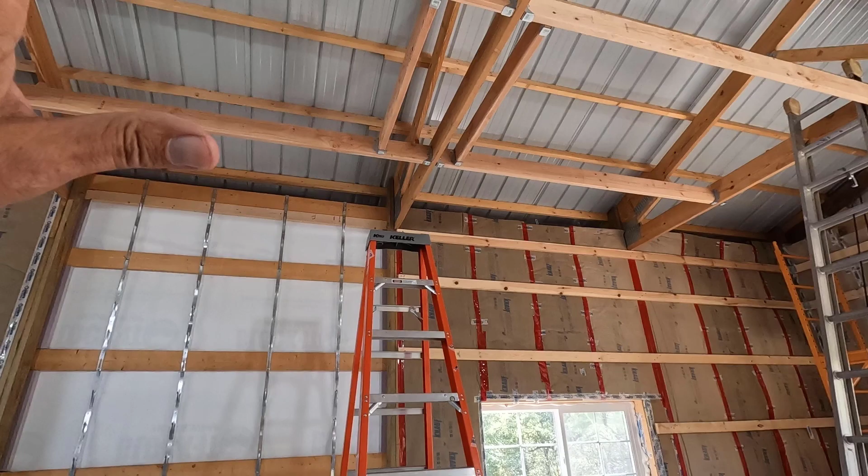Today I'm going to show you how to locate and pre-install shop furnace hookups.

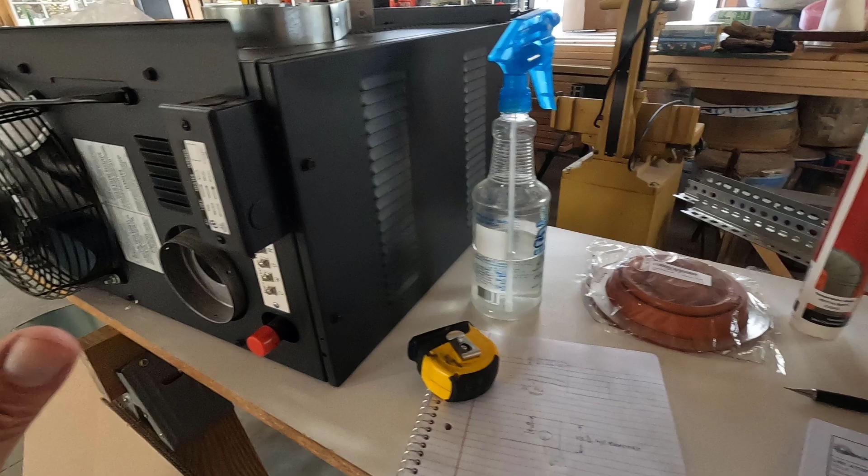So what I'm doing here is going back and forth to the various pages in the installation instructions, getting information like this. This is my unit right here, and I'm double checking all that on the unit itself and then marking that on my notepad. Once I have everything located in one place right here, I'm going to start cutting tin, routing propane lines, running the electric, all that stuff.

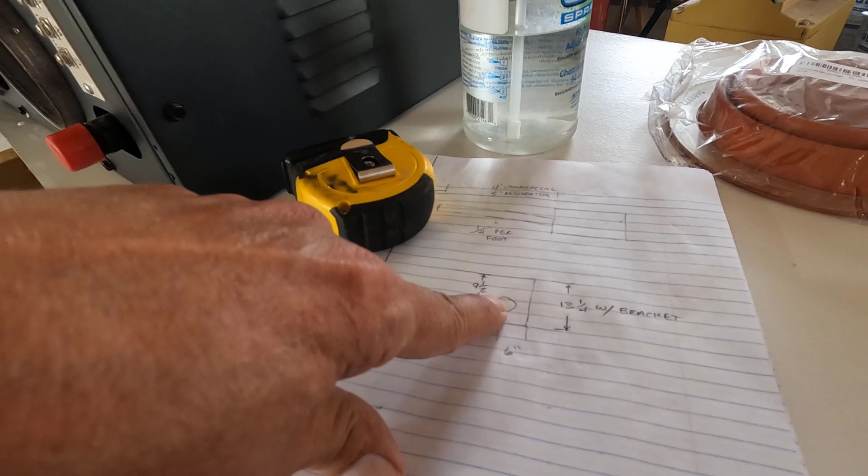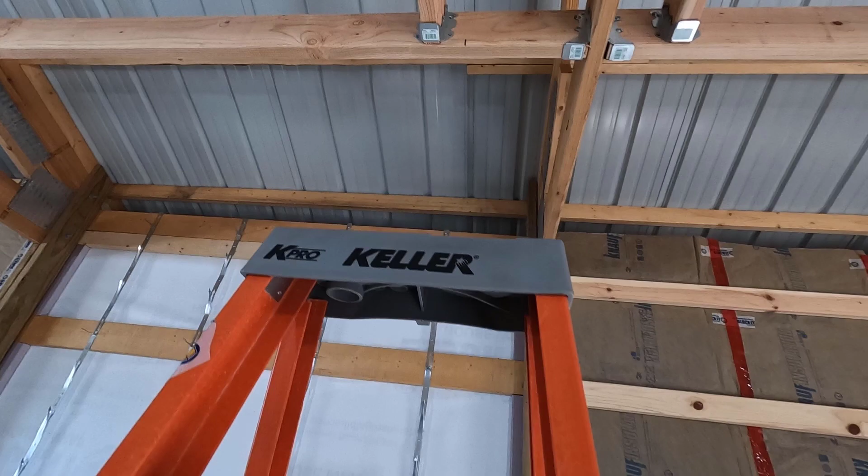So what I have so far is the exact location of the flue on the back of the unit. Now I need to transfer that to this area right here. I put in this special blocking here, and for the life of me, I can't remember if that little hash mark, you can see I got a little hash mark right here, is supposed to be where the flue is or not.

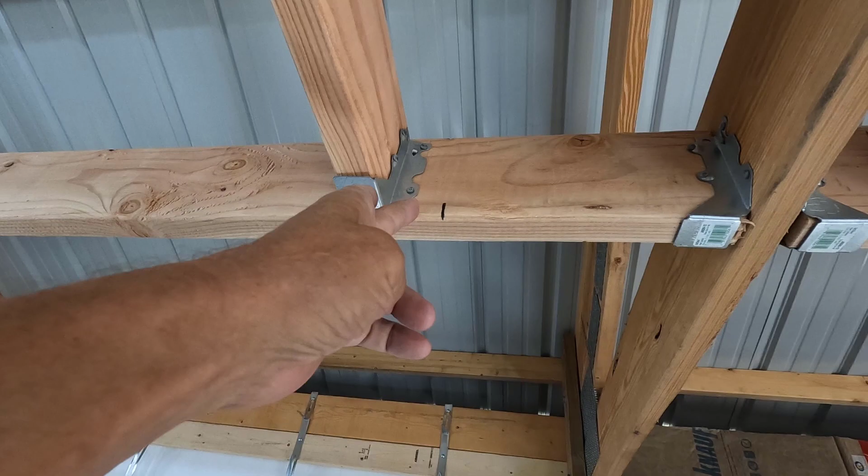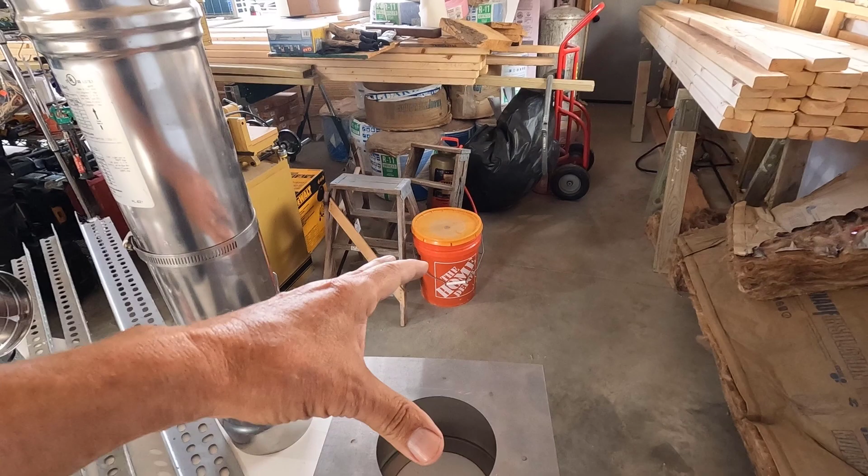But once I get that figured out, I'll transfer a line over to there. What I'll do is measure from here to that line and do the same thing over there. Then I've got to come downwards and figure out where this flue is going to come through the wall. I've got to put this stuff up there. Once I figure out where it's going to go through the wall, through the tin here, I have to measure the slope. It's got to have a downward slope to the unit, and that'll give me the height of the unit down from the ceiling. It sounds a little complicated, but I'll explain it as we go.

I did the very same thing with a mini split in our addition. I put a chase built into the wall a couple years ago, and a couple weeks ago I installed the unit, and all I had to do was drill a little hole in the wall, and there was a chase going through there. I could just stuff all the stuff right through the wall. In this case, the entire hole is going to be in place, and once I get the ceiling in, I can mount the furnace and then run the line right through the hole.

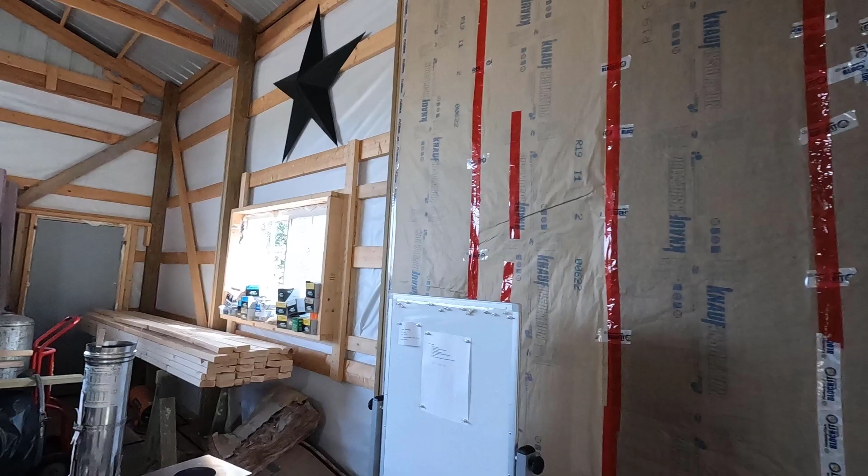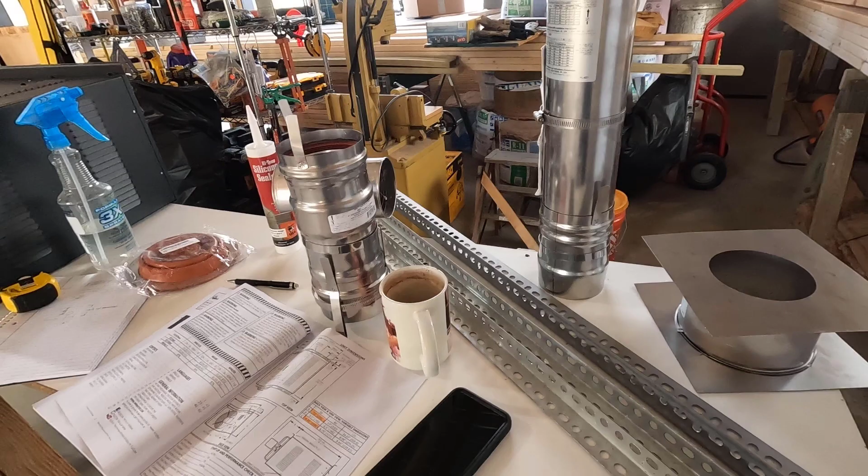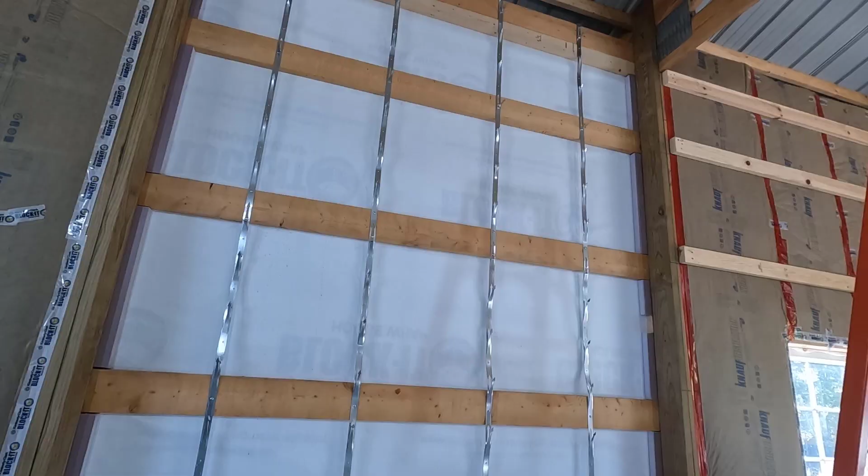Whereas this will be on the outside, and these two will be on the inside, and those two will be connected by a piece of tin right here. This will be the outer jacket of that. All right, we'll figure all that stuff out later. Right now, let's figure out where this flue is coming in from the post right there, and then from there we'll get a location where that goes through the wall.

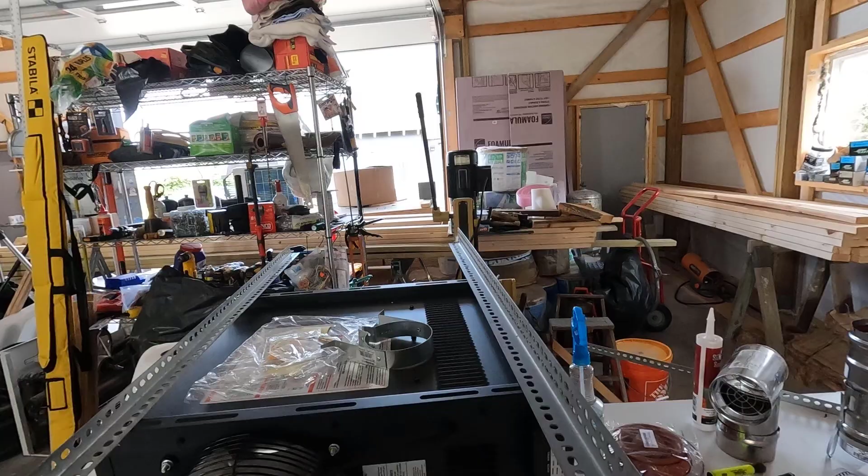All right, I have everything mocked up here. The spacing on the mounts up there is 22 inches. And let me try to get this tape measure for you.

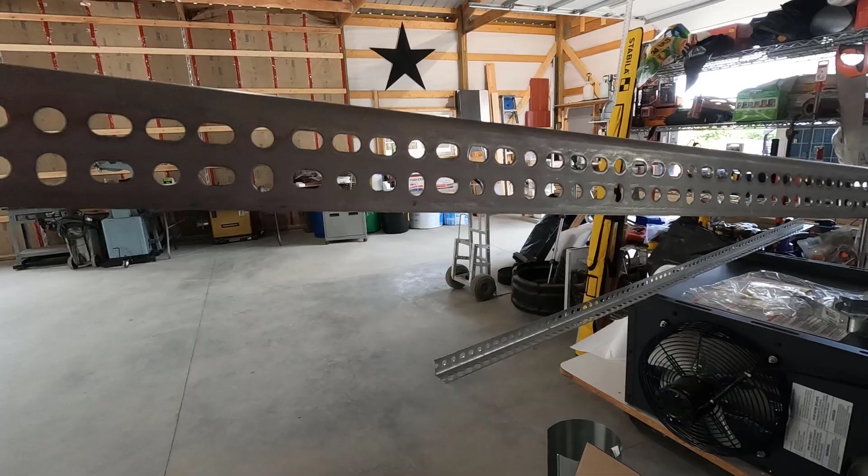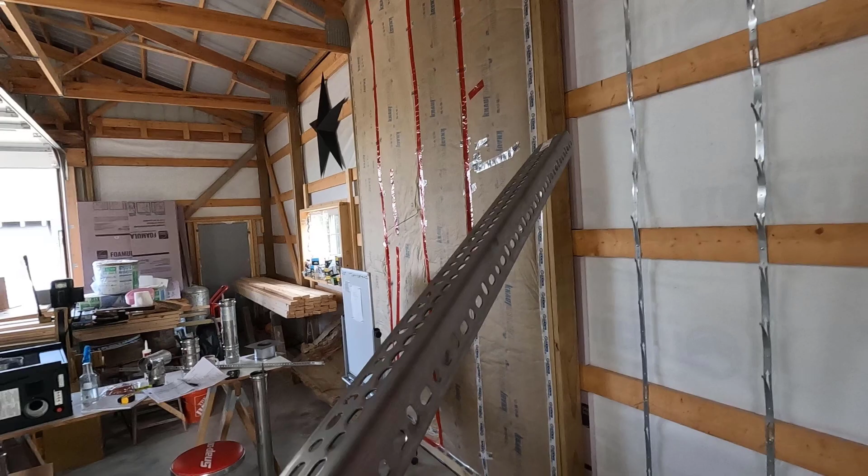That will look like this on the unit itself, but it's not going to sit like this. This is going to be cut in half, and these will go on the ceiling, and they'll actually go on like this, and then we'll be using these to come down to the unit. I'll show you that real quick. It will look like this with the flat part outwards, and it'll be attached just like that. Then the other members will attach to this lower part with the double holes in it.

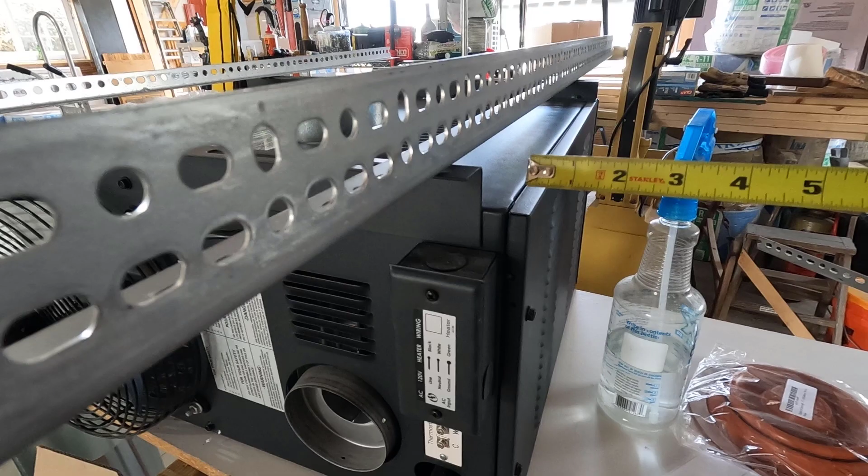So with the bracket in the correct location, that gives us 1.5 inches from the outside of the bracket to the outside of the unit, just like this. So from the bracket up there, it would be the 6 inches minus the 1.5 inches, or 4.5 inches. 4.5 inches from the outside of that wood member there to the hash mark. All right, so 4.5 inches is to right here. That one is incorrect - that one was at 3 3/4.

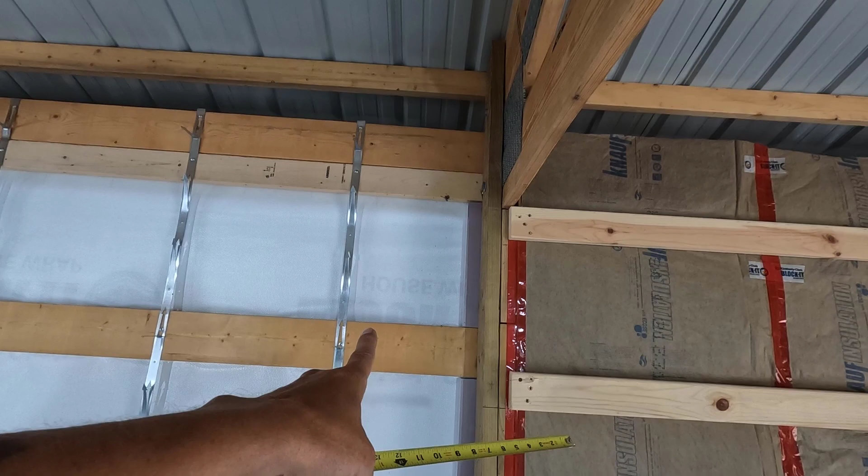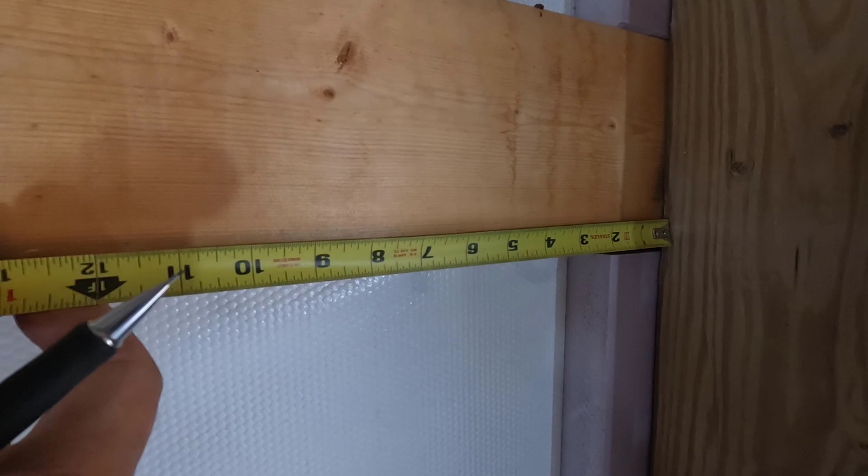Now we'll get this measurement. It is 9 3/4 from the bottom of the truss here, so we'll have to remove 1.5 inches from that. Our flue's going to go out down here, so let's get that marked over there. I lost my head mount camera, but this dimension is going to be 8 1/4, which is right here.

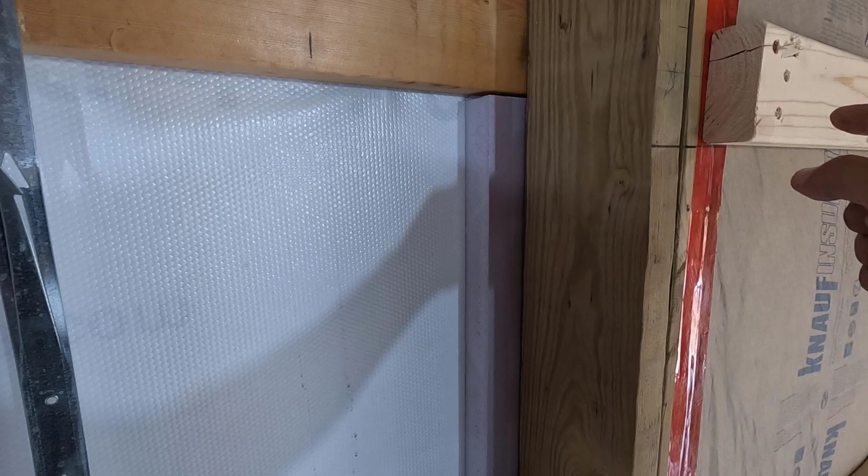So now that I have my 8 1/4 marked, I have to figure out the height. I've got to go below this girt here so that I don't hit this girt right here, but I need to attach that pass-through flashing to both of these. So I might have to add a little bit of wood to the bottom of this. We'll see - let's get some dimensions here.

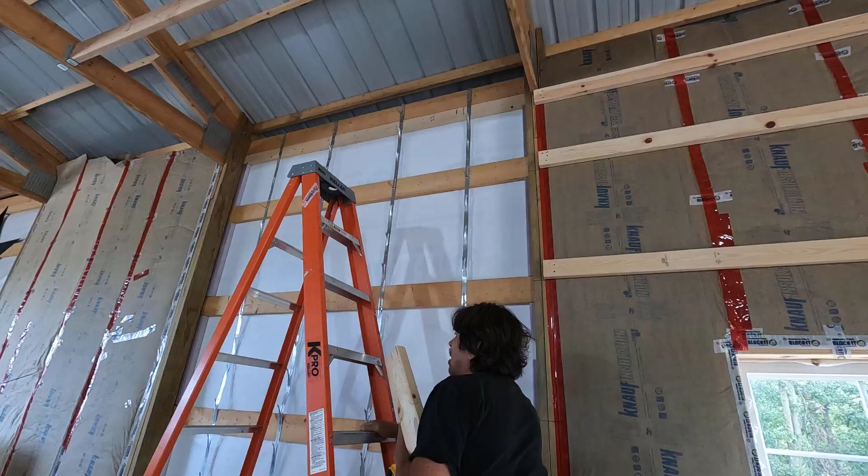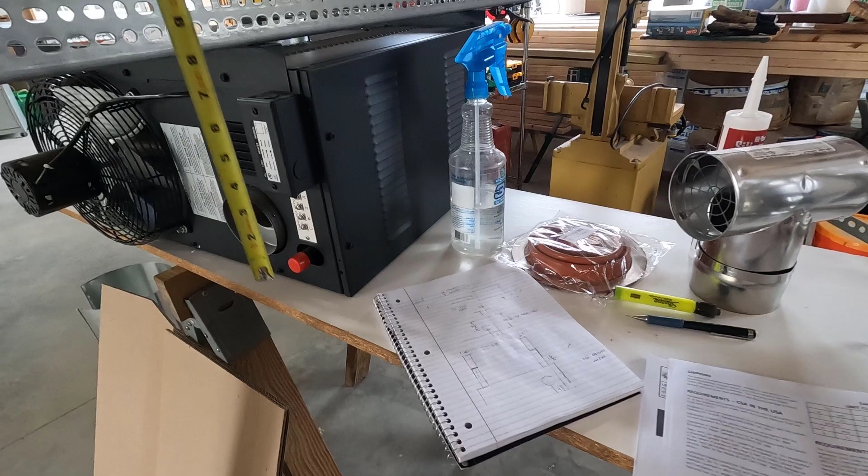All right, now it's time to check the height of this unit with the bracket in place. We have a little more than 15 3/8, and we would want at least 2 inches in addition to that. So we'll call the minimum height 18 inches.

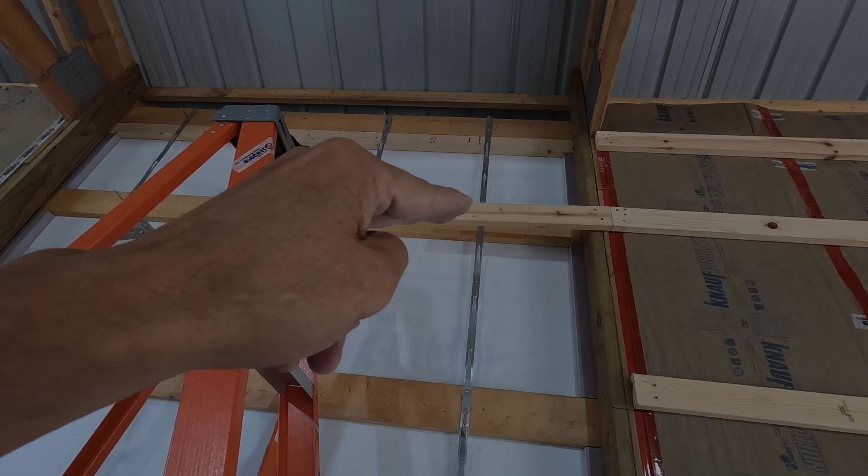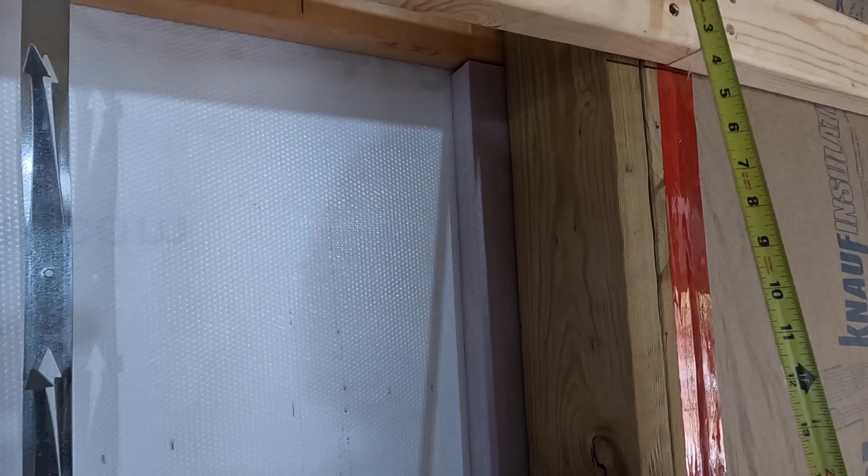So I got to measure down from the bottom of the truss there 18 inches, and then try to figure out if I can go above the girt or if I have to go below it. Okay, things are coming back to me now. 18 inches means I'm going to have to go below this girt, because 18 inches comes to right here somewhere.

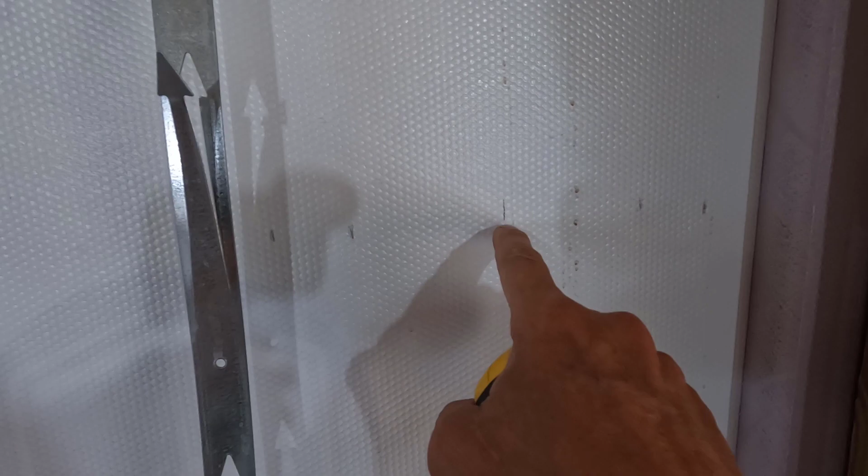That's not a problem. The problem is that this 8 1/4 dimension isn't going to work. I have the raised parts of the tin siding right here and right here, and centered on that we come to 8 7/8. So I got to go over 5/8, which is no problem at all because

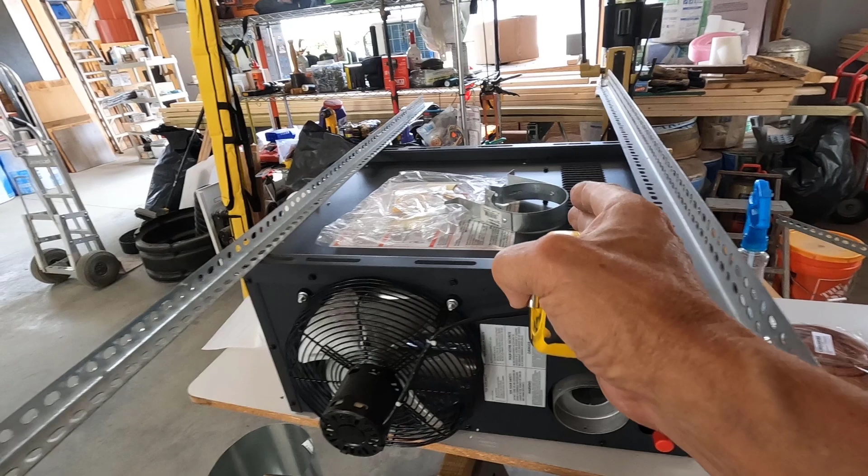of these real nice long slots. The brackets still got to go wherever they got to go, but the entire furnace is going to move over by 5/8 of an inch, which I have plenty of room for on this. It's actually going to move that way, so all that's good.

Now I have to figure out how I'm going to get this pass-through flashing attached to that wall, and I got to get this one attached to the outer wall.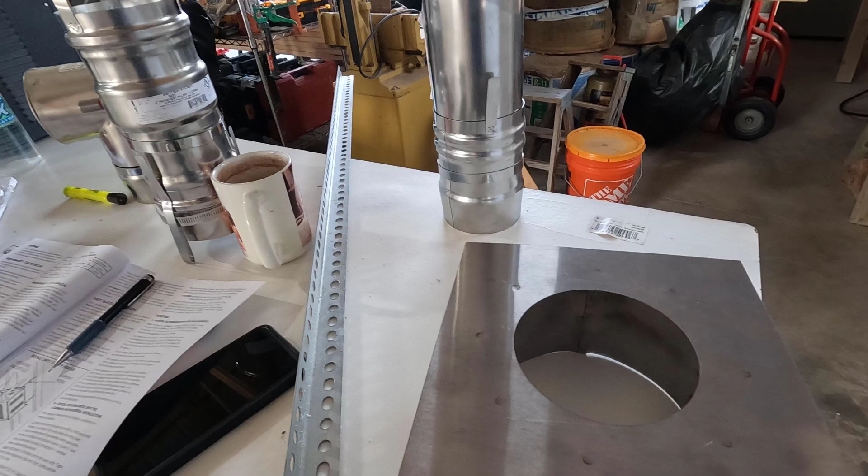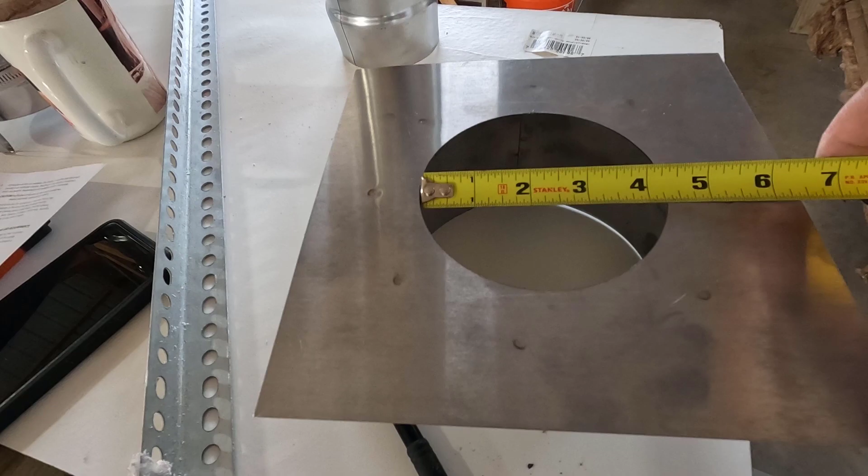So we'll just move everything over by 5/8 of an inch. All right, now for the wall thimble. On this particular one right here, we have a 2-inch outside space all the way around, and then we have a little bit more than 4 1/4 inch hole in there. On this one, we have about 1 7/8 inches. Same here, there's 2 1/4 and 2 3/16.

None of that really matters. What we're going to do is take the center dimension on this one and then figure out how much this is going to go. What is it? 1 1/4 inches. This is going to go onto the girt 1 1/4 inches.

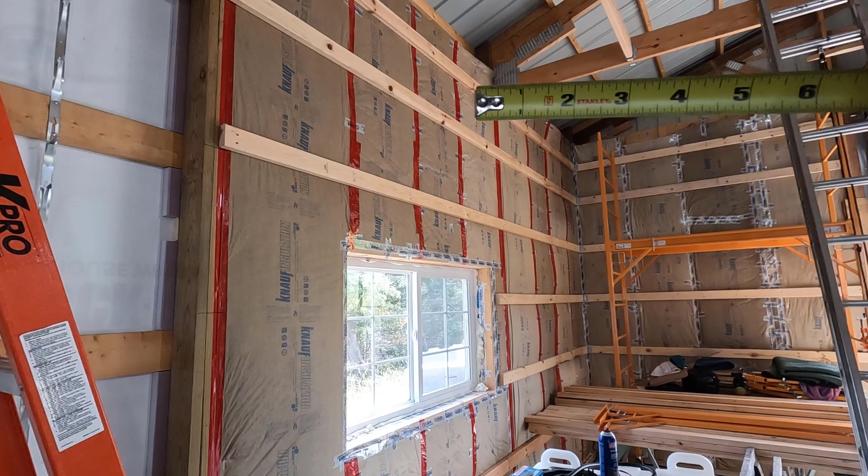So we'll measure down to the center of this, then use a level and transfer that line to the outside wall. Then we have to go up about 3/16. This wall at this area is a little over 8 inches thick, and the pipe wants to pitch at 1/4 inch per foot.

So what we need to do is have the outside one 2/3 of 1/4 of an inch, which is right under 3/16 higher than the inside one. Hope that makes sense, but we'll show you exactly what we're doing in just a minute.

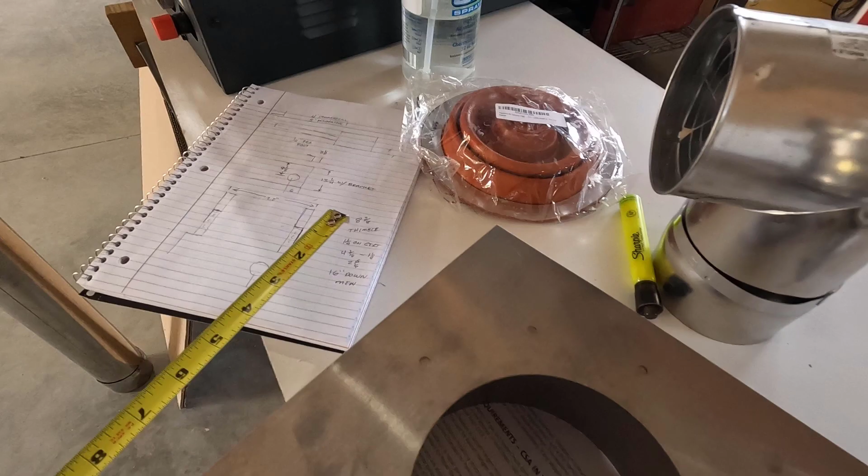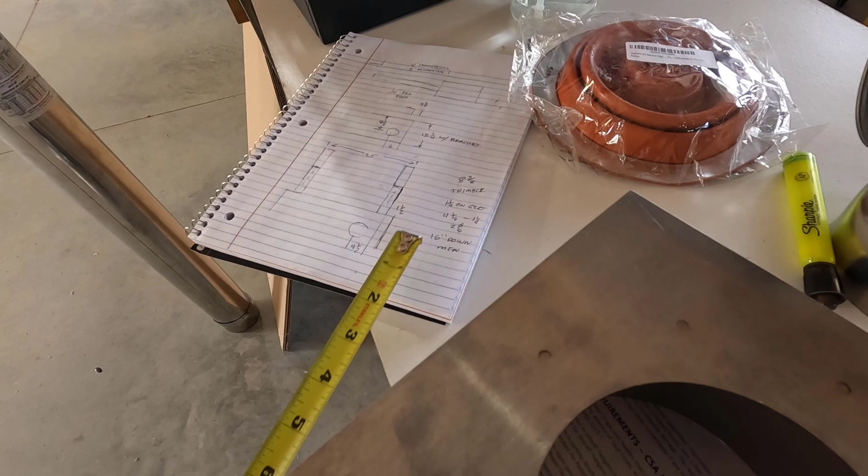All right, I'll show you my math here. I have 8 3/8 for the thimble, so the center of that is going to be 4 3/16, which I have written right here. We have the 1 1/4 flange here, so you have to subtract the 1 1/4 from the 4 3/16, which gives you 2 15/16. So what I did was mark a 1x3 with the 2 15/16, clamp it to this board.

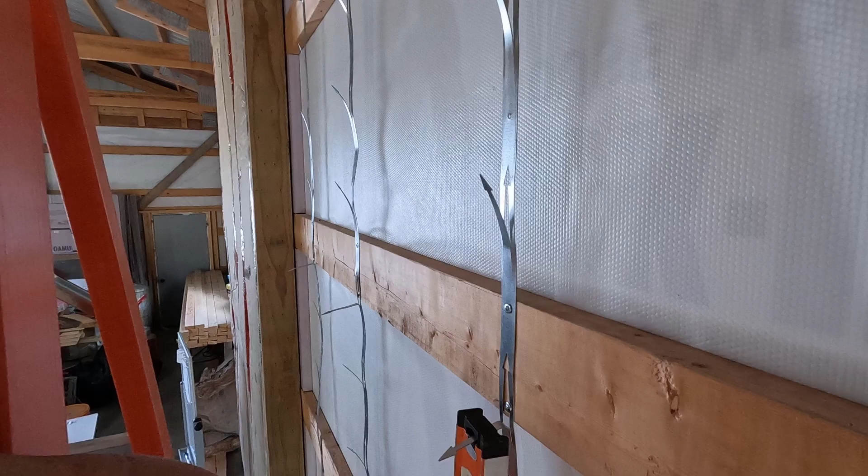Now, if I take a level and go across to the outside, I can get the exact level spot on the outside. Then I just need to go up 3/16 of an inch and measure over that 8 7/8, and I'll have the exact center of where the flue goes out through the building.

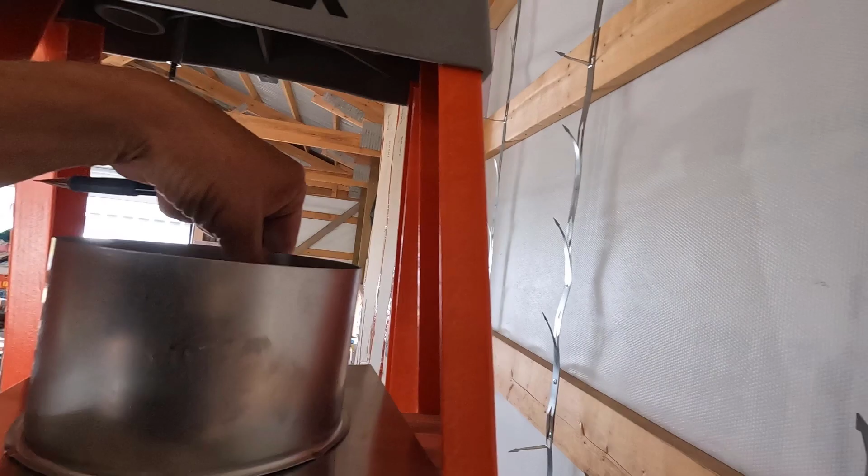Okay, this right here is the center of the inside thimble, and then I transferred this line across, and then I went up 3/16 and then over to 8 7/8, and that is the center of the outside thimble.

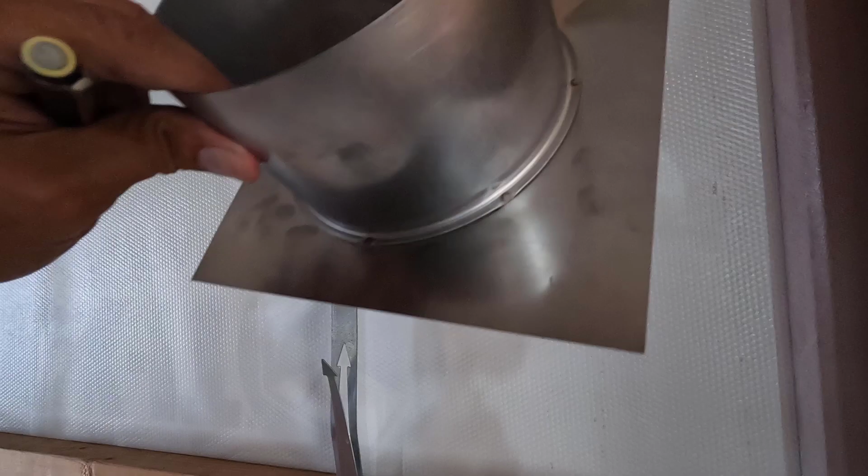So what I want to do is roughly center this outside thimble on this, and then draw the outline on the house wrap. I need to cut that house wrap and then redo this, get a hole drilled, and then I'll tape the house wrap with duct tape, actual duct tape.

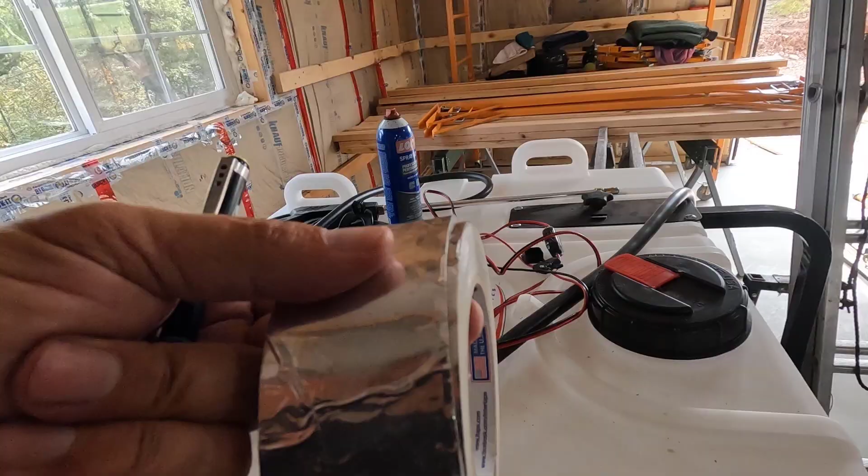Let me show you that real quick. This stuff here, it's aluminum and it's made for sealing ducts.

So let's get that done and get the hole drilled, and then I believe I might be at a standstill. I don't know if I have the correct stainless steel rivets or stainless steel self-tapping screws for this. I'll go check on that, but I can get that hole cut right away.

All right, I got that all cut out, and we're going to go look at that in a second, but I just wanted to point out that that original hash mark I had on that joist up there was in the exact correct position. I just forgot how I was doing this because it's been nearly a year.

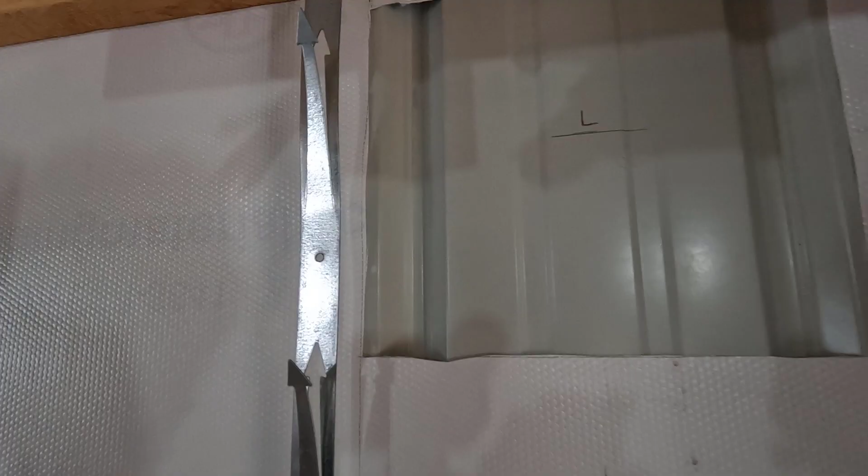Okay, so what I'm going to have to do next, I got my horizontal line, then measured up for the pitch, and got dead center on this, because that's where it's got to be. That's where I'm going to drill my hole.

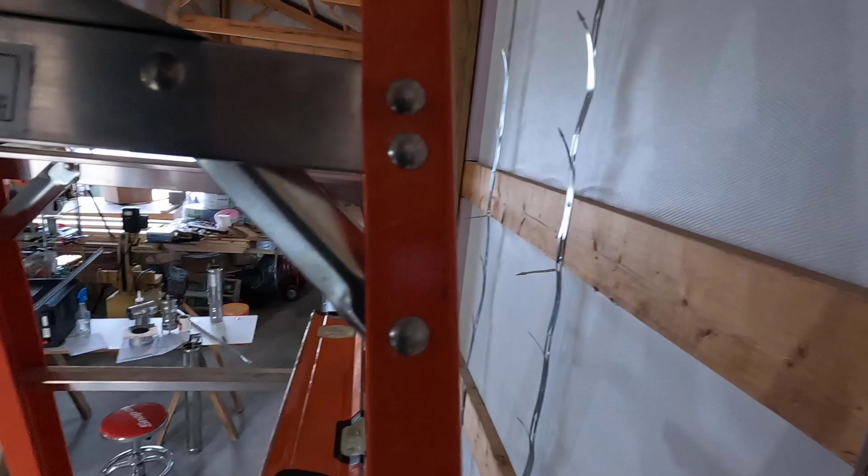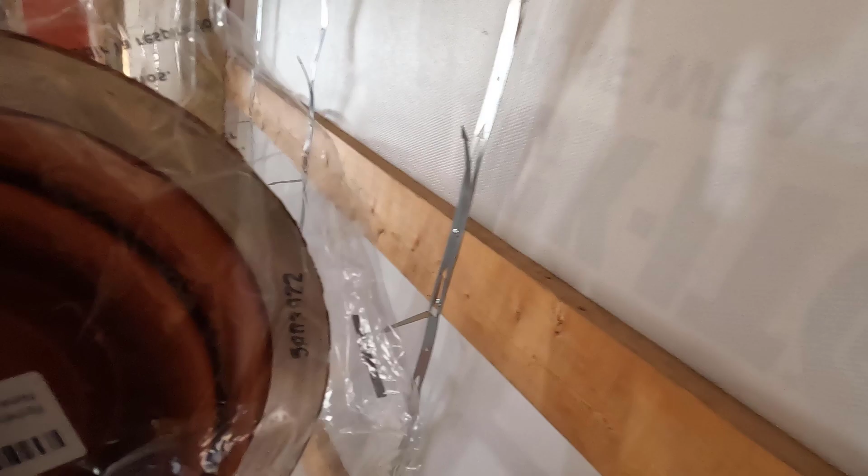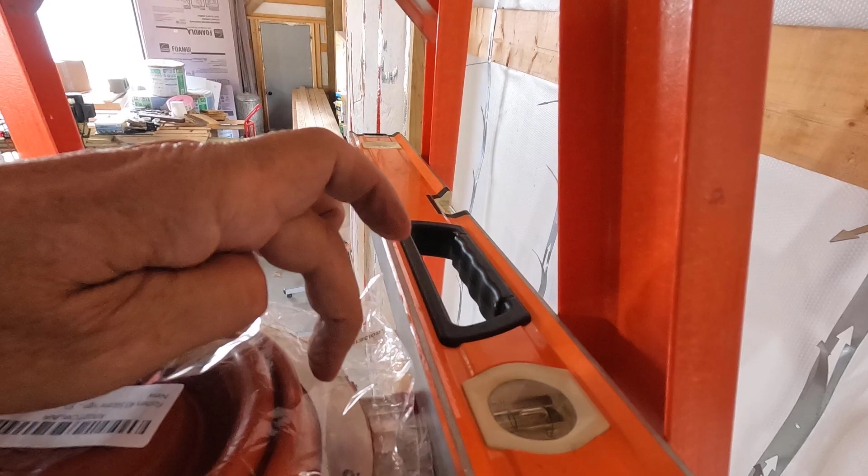Once I do that, I'm going to take this piece, which has a little hole in it as well. I'll put a nail through that hole, run it through, hang this in place, and trace it onto here. That way I can figure out where the outside edge is, and that'll give me the location for the rivets. I don't want the rivets exposed on the outside, so they'll be behind the rubber, right here, here, here, and there.

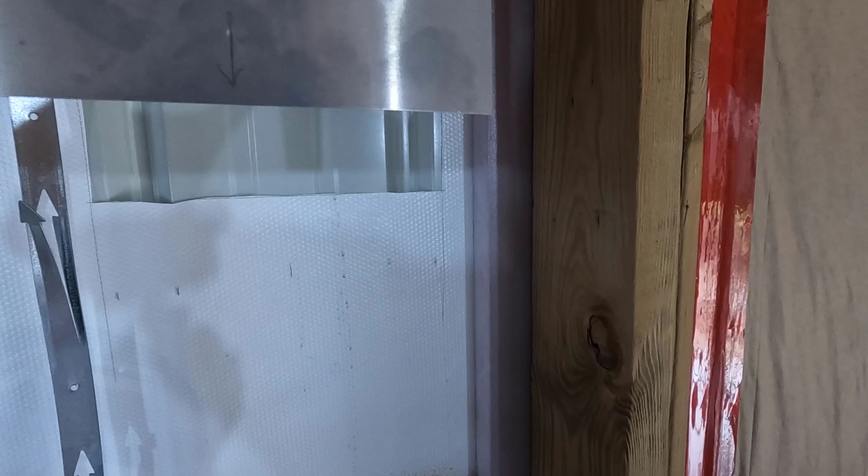Now, taking a compass and drawing the size of the hole that's going to pass through the wall.

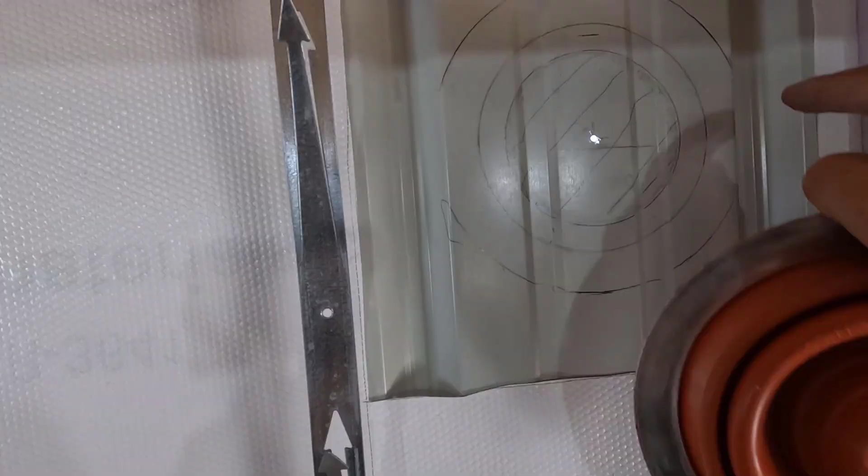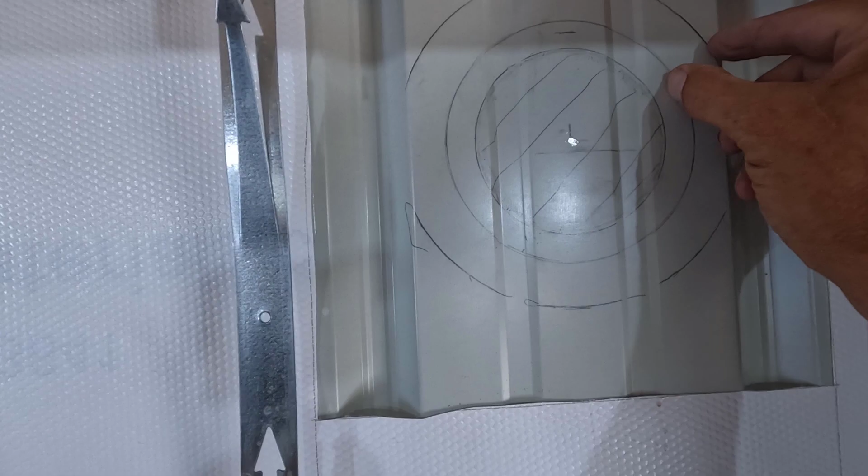All right, let me show you what I got here. Got a good amount of lines. This outer line is the outside edge of the boot. The next line inside from that is the inside of the boot. The boot's going to go on the outside like this, and it'll get cut out for the pipe. So this is where the boot meets the wall, and it'll be caulked in with high temperature caulk. Between this line, the cutout line, and this line, that represents the flange inside here.

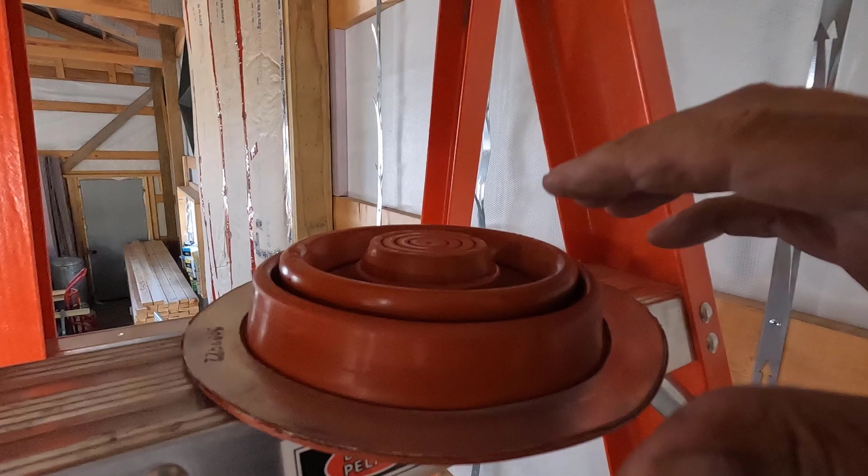So what I'm going to do is set my compass between the hole and this line right here. That will hit inside of here, and it won't show outside of the boot, so it'll be completely hidden from the outside. I'll go outside and draw a circle where that line is, then draw another circle where the cutout is. I'm going to drill a hole from out there, right where that rivet goes.

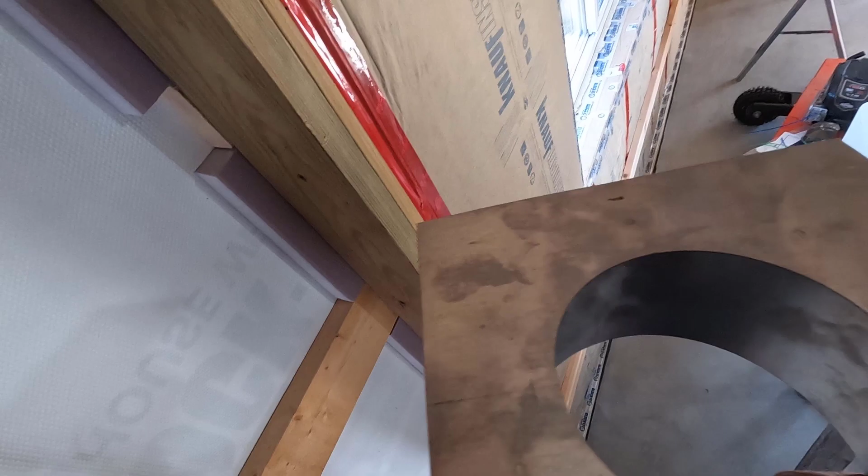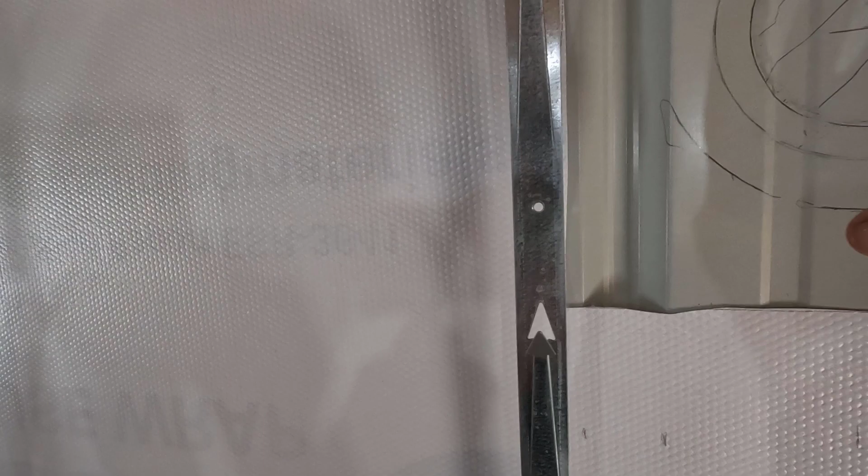I'm going to put a rivet through it, and I have it marked on the front of here. Kind of hard to see, but it's right there. I'll drill a hole in that as well, and then rivet this into place just like this.

Then from the outside, I'm going to drill maybe 4 or 5 more rivet holes and get this riveted really nice and tight to the outside. I'll do that after this hole is cut though.

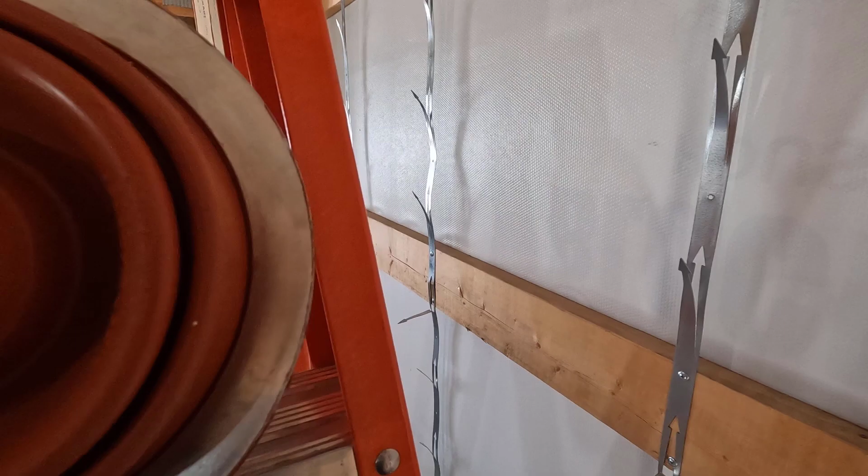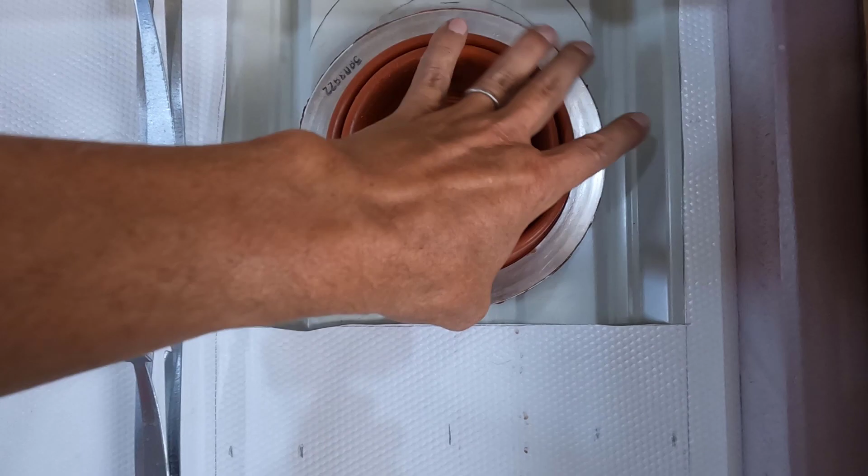Once that's all done, this is going to go on the outside just like this. I have to trim just a little bit off each of these edges so it fits in between these valleys here. Trim that, and then this gets screwed to the outside with self-tapping stainless steel screws all the way around, and it'll be caulked with high temperature caulk as well. This is high temperature silicone, and you just cut it for whatever diameter pipe you're using.

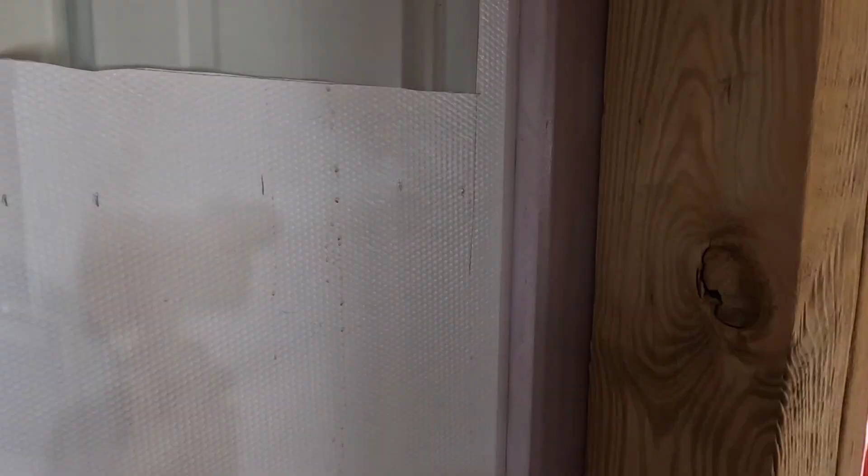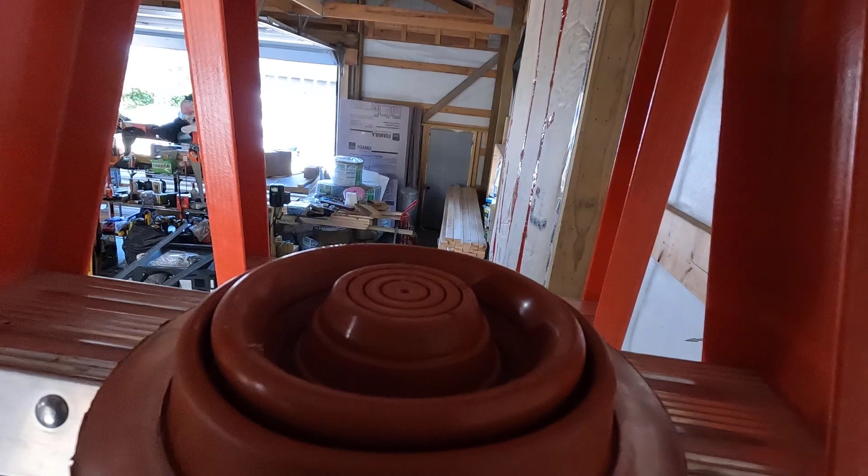I believe my diameter is right here, so the pipe will just slide right through this boot to the outside. When I'm done with this, this will be here. The outside edges will be taped up with aluminum tape, and there'll be a hole to the outside to the boot. I probably won't cut the boot yet until I'm ready to put the pipe through it.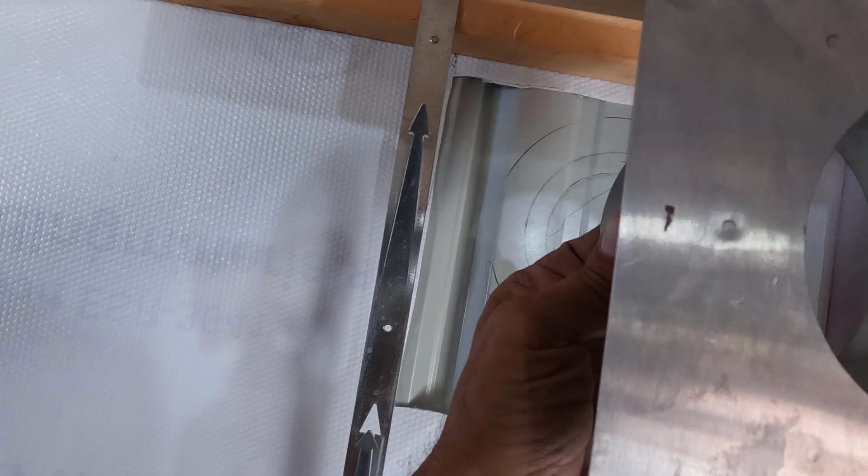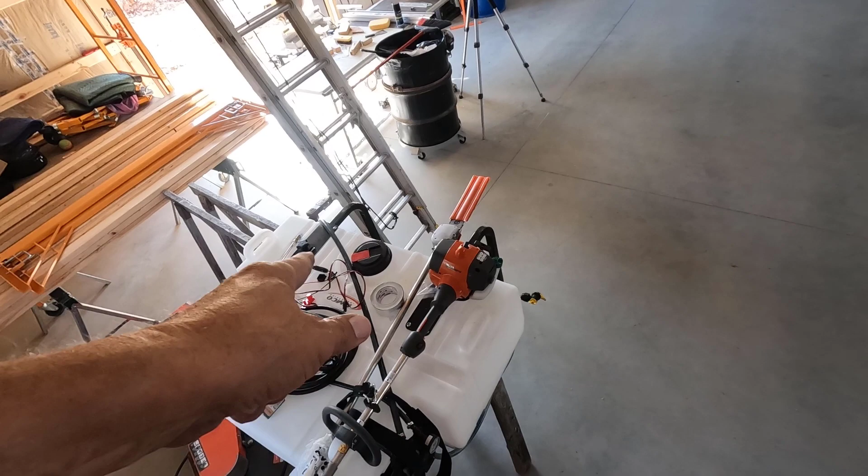And then we'll have another one of these right here. There's going to be a small gap between the two, and I'll be sealing that. I was going to use a section of pipe, but I can seal that gap with aluminum tape instead. I just have to put on 4 or 5 layers, and that should be just fine. Once both of these thimbles are in here and my boot's on the outside, like I said, there'll be that little gap. I'll tape that up, then wrap the entire thing with a ceramic blanket and insulate right up to it.

So that stuff's all figured out. Now I just got to figure out how I'm going to do the electrical, and most important, figure out where I'm going to run the propane so I can finish running this propane line.

Okay, what I did here was measure 4 feet over from the finished face of the wall, that's going to be tin up there right on the face of those girts. So I measured 4 feet from the girt out to here, figured out the dimension from the joist over to that mark, and transferred it over there.

Then I clamped that piece of wood there, got it plumb, screwed it in place. Now I need to get a level line from that hole over onto this board, and from there I can figure out how high the unit's going to be. Once I know that, I'll know where I can put my propane line and my electric line.

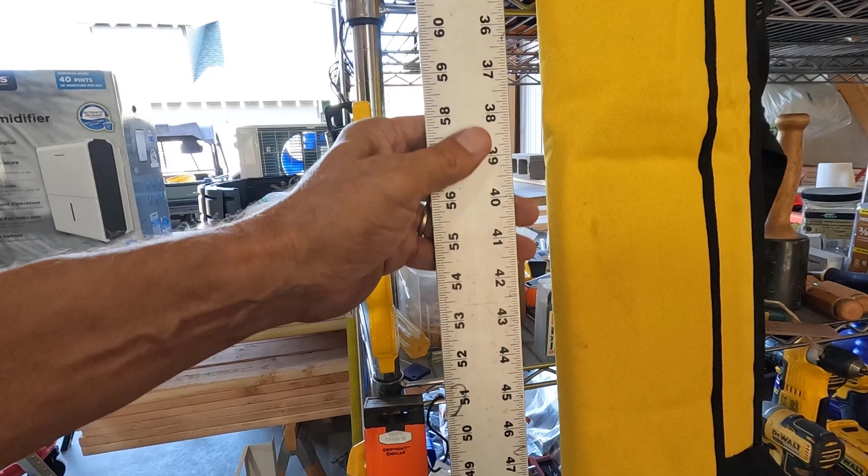I could use my big Stabila plate level on this, but it's pretty heavy, so what I think I'll do is just use this aluminum straight edge and put a 4-foot level on top of it, get right in the middle there, and that should do it just fine.

Okay, let me show you what I got here.

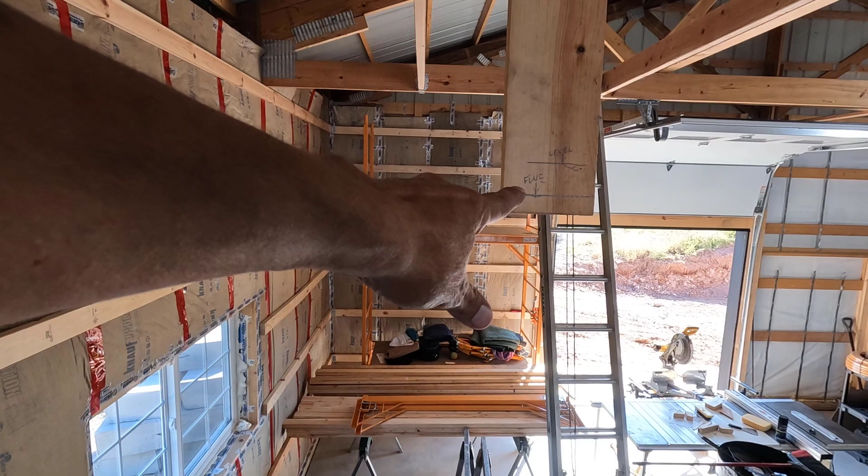This line right here is level across to the hole in the side of the building. This is 1.25 inches down. The distance between the back of the unit and the outside of the building is 4.5 feet. We want it to drop a quarter inch per foot or more, so I'm going a little bit more, going 1.25 inches down.

So this is where the center of the flue is going to be. This is where the top of the unit's going to be, and that distance is about 13 inches down from the ceiling.

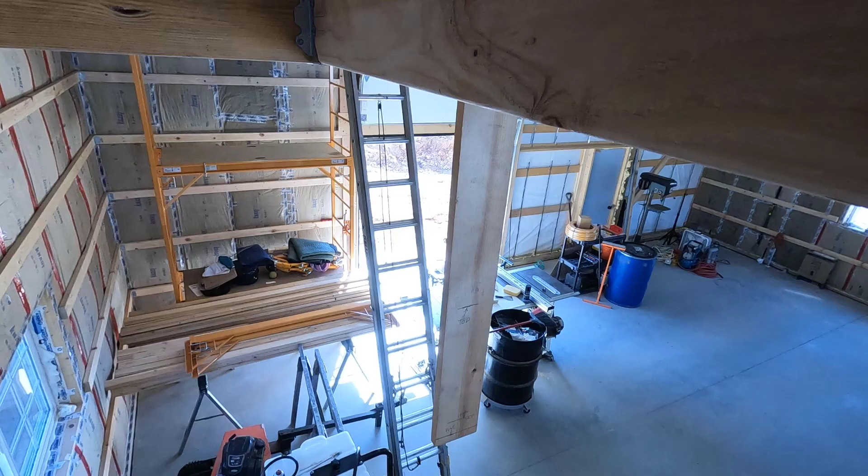So how I'm going to run the propane - you might not be able to see it, but the propane's over there. It's going to go across that joist, have a T, and run right along this truss with flex pipe, which is going to curl out and come right to this area here somewhere.

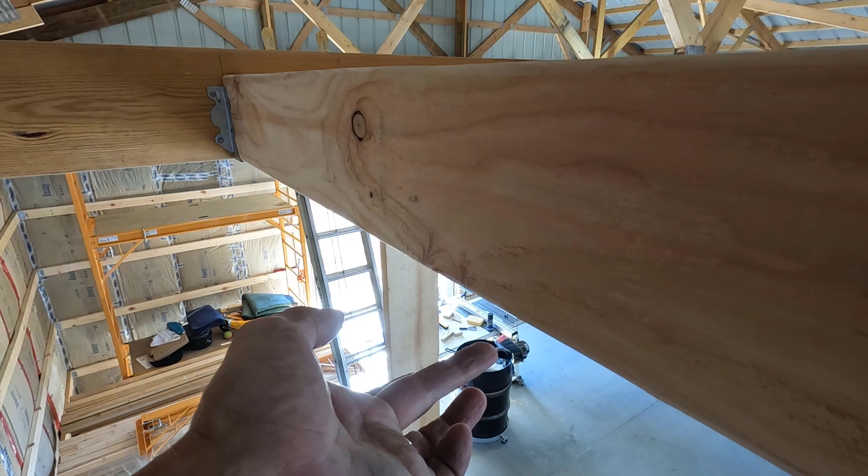What I'll do is strap a nipple to this joist here, and the nipple will come up a little bit over the top, and we'll connect the line to that, and it'll come a little bit below the bottom. Once the ceiling's in place, we'll put a union on that.

That gets a bunch of different fittings - it gets a valve, a drip leg, and some other stuff. Then it's going to have its outlet facing towards the wall here, and it'll have flex pipe going in a U shape and connecting to the unit like that.

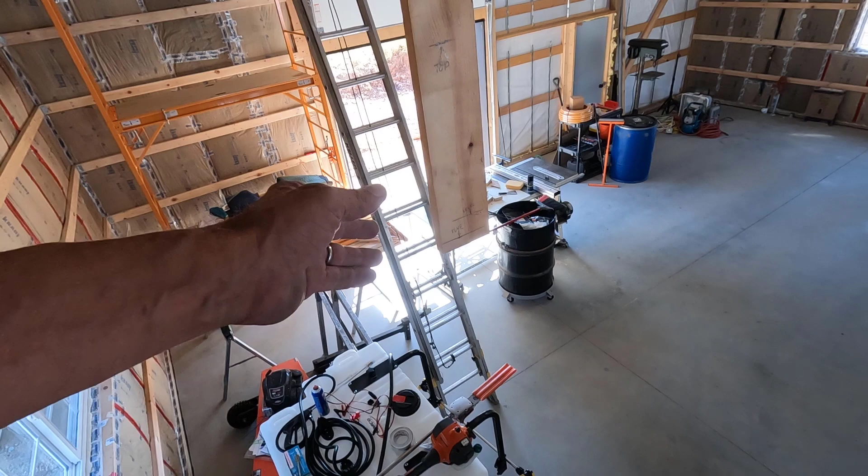So what I'm going to do is get that flex and bend it and see about where it wants to come to, and I'll just use that distance. I'll also get the nipple - I don't need the rest of the stuff, just the nipple itself and a few brackets to hold it onto here. Then I can run all the rest of the propane lines.

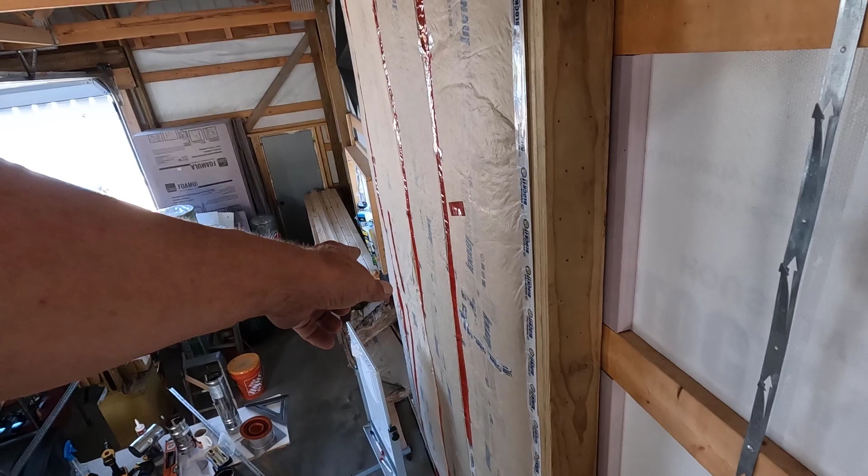I've been debating how to do the electrical. I'm going to have a box right over there, and I can run a wire right from the box up into here, across, and have it ready to go right here. But that's not going to go in for a while.

So what I actually think I'm going to do is run some Romex from over there and get it to a point right in here somewhere. Once this section of the ceiling goes in, I'll screw a box to the underside of the ceiling and run the Romex into the box. Then from the box to the unit, I'll just have a loop of BX.

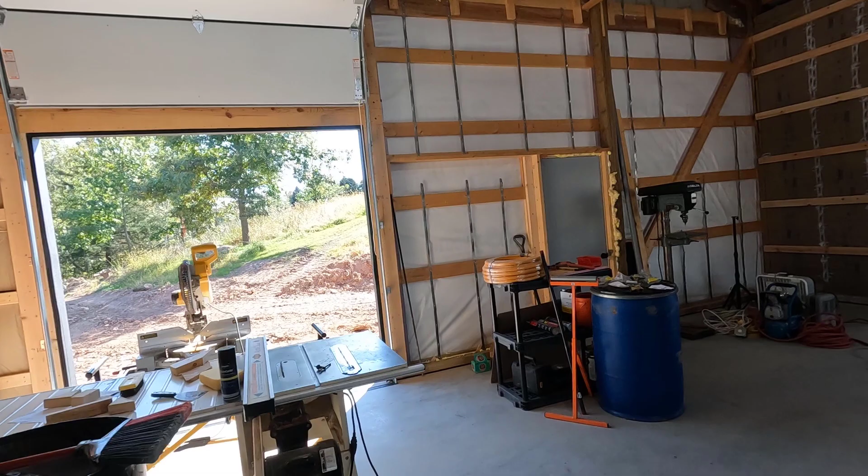I have to run to town for those rivets and screws, so I'm not going to be able to finish this until then. But I thought I would show you some of the other stuff here.

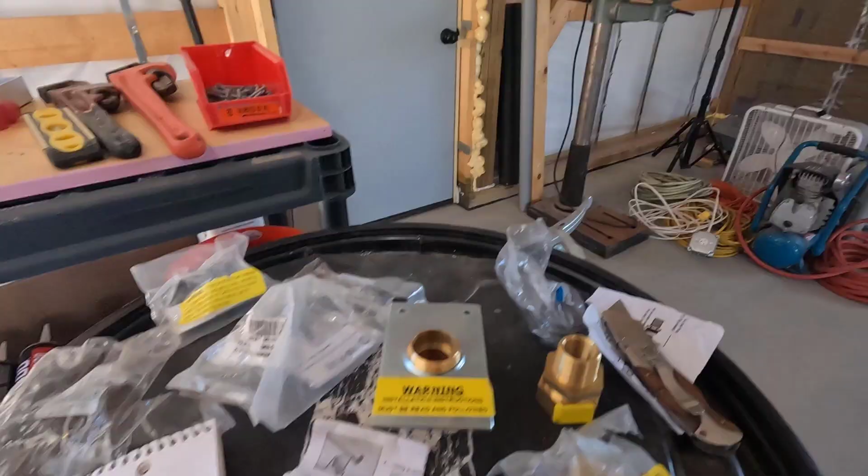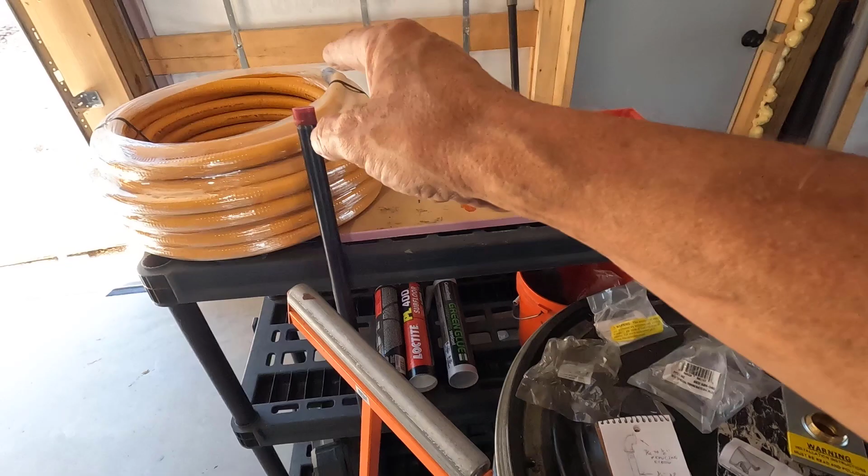That is the T. This is the line I'm going to be running, ProFlex. So from where the test unit is right now, there's a little nipple on there. That nipple's going to come off, and we'll put one of these on there. So we'll have this ProFlex going from there to the big T.

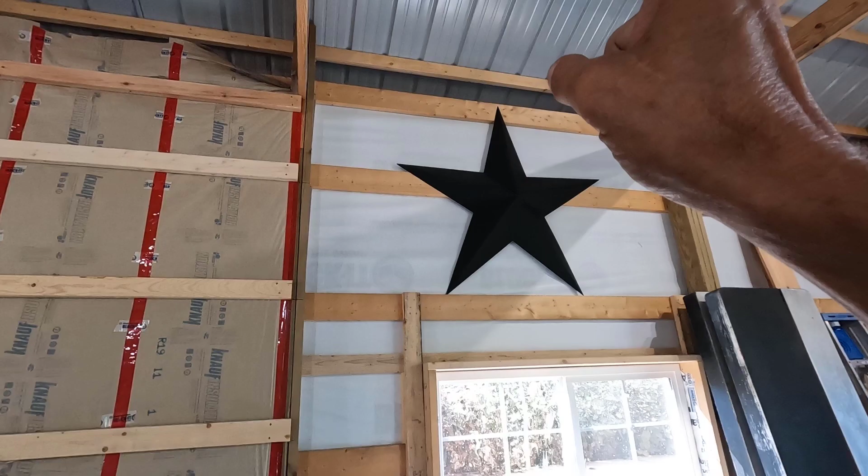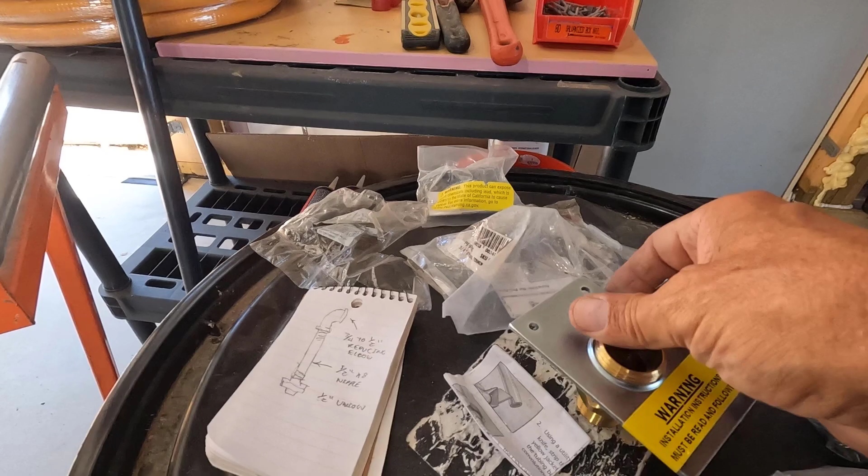The big T is going to be right in here somewhere, and one line's going to go across for the furnace, and the other line is going to go right on top of this joist here, coming through the wall right here, and it's going to be plugged off right there with this. I believe this just takes a 1-inch cap, but I'll have to look into that. It'll be plugged off, and at a later date I will probably put a heater in that side as well.

Just to work on stuff in the winter, and for the most part, that area will be unheated.

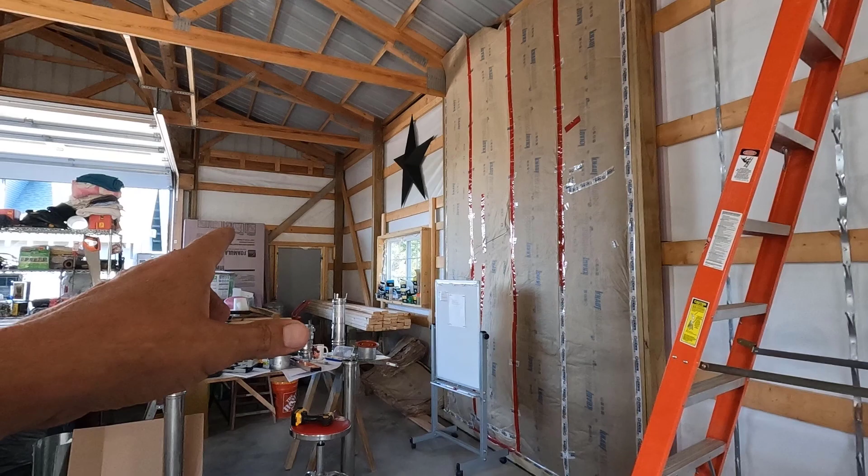All right, so I'm at a standstill for today, so I'll get back with you in a couple days after I go to town, and at that time we'll get that hole cut in the wall, get the back part of the thimble in place, and get the boot in place.